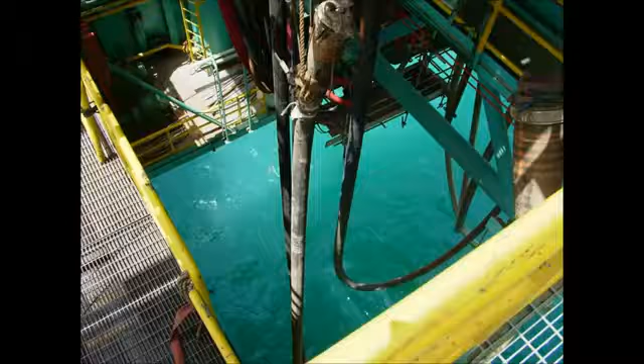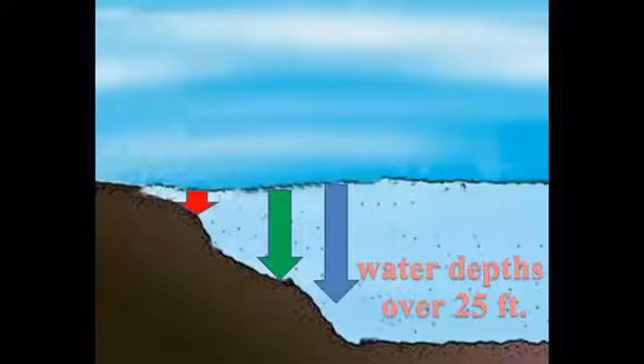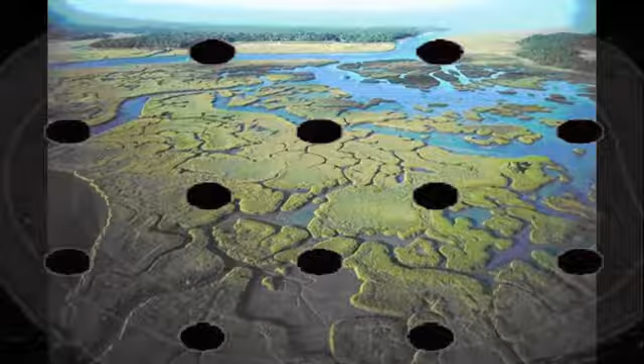When water depths reach over 25 feet, jackup rigs are used to complete the drilling program. Able to drill straight holes, not deviated ones, these jackups usually follow a grid-like pattern similar to those used onshore and in protected waters. Each well has a piled jacket that is either set down over the tree after completion or can be preset and drilled through from the cantilevered floor of the jackup.

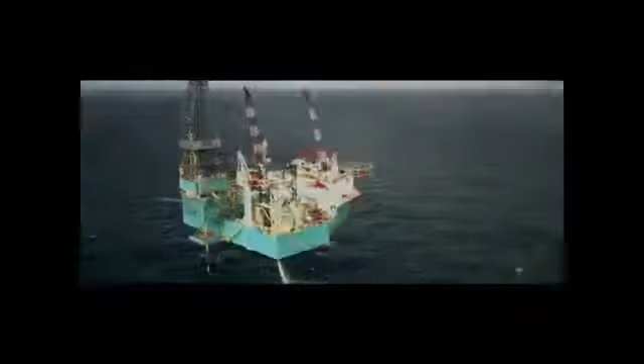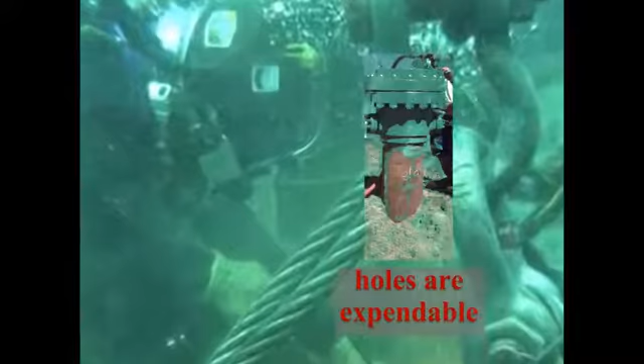Wildcat and delineation wells drilled in deeper water with more intense wind and wave action using a jackup, a drill ship, or a semi-submersible will be cemented and abandoned once the appraisal is complete. These holes are considered expendable because the delay in building the platform and the surface facilities to produce and support this field may take several years.

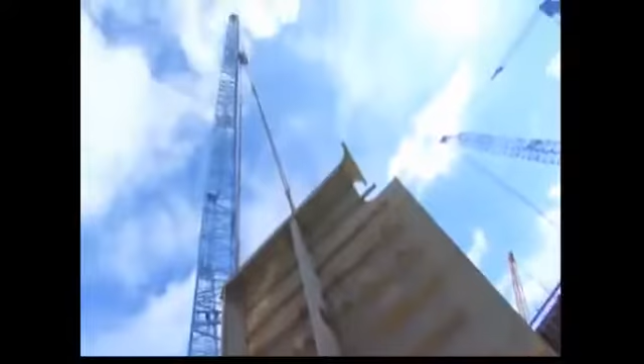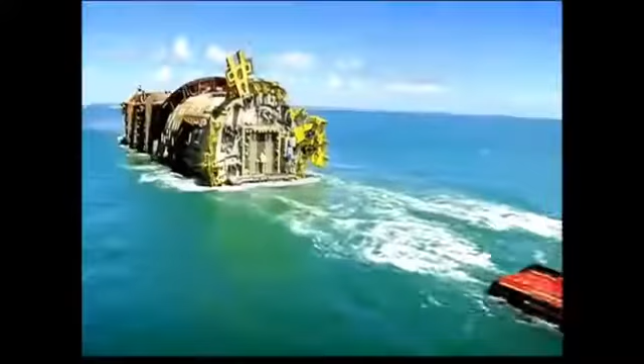Instead, once a platform is deemed necessary, it will be designed for the precise water depth, the intensity of the wind and waves, and the bottom conditions. Constructed onshore and then brought to the site to be reconstructed and installed, the platform will have a drilling rig installed, and the first thing that they will drill is all new holes for production.

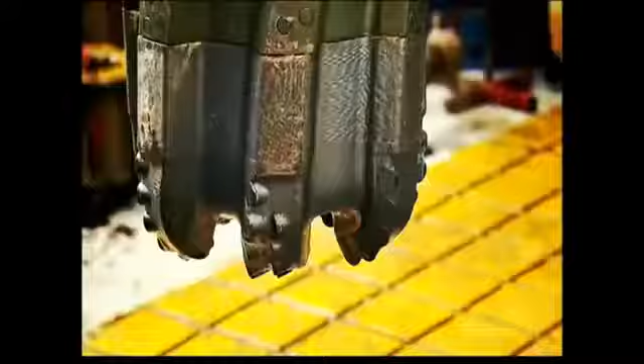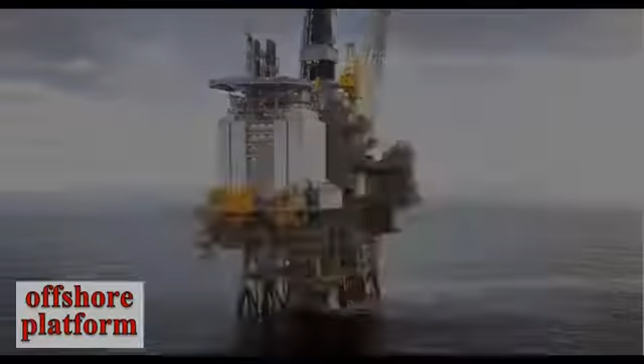As the water gets deeper, platform costs escalate sharply, so vertical wells with individual jackets are replaced by multiple directional wells that can be drilled from a single platform. Larger fields, however, can still support multiple platforms. A platform may house all the facilities associated with the rig, or the rig may be tender supported.

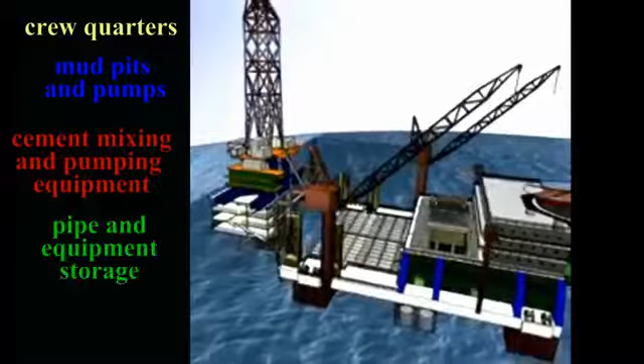If the platform is tender supported, this means that next to the platform there is a floating, anchored boat, either ship-shaped or semi-submersible. On this anchored tender are the crew quarters, mud pits and pumps, cement mixing and pumping equipment, pipe and equipment storage, and other necessary equipment. Lines connecting the tender to the platform carry power, cables, water, and mud.

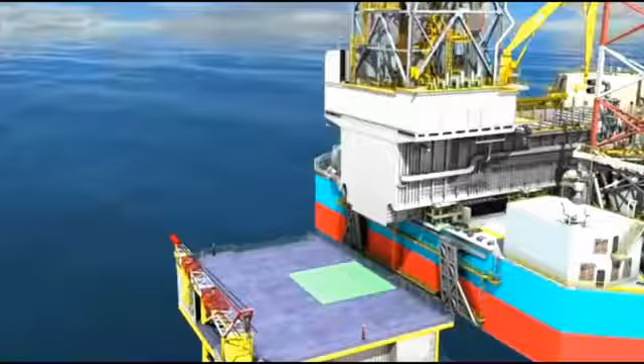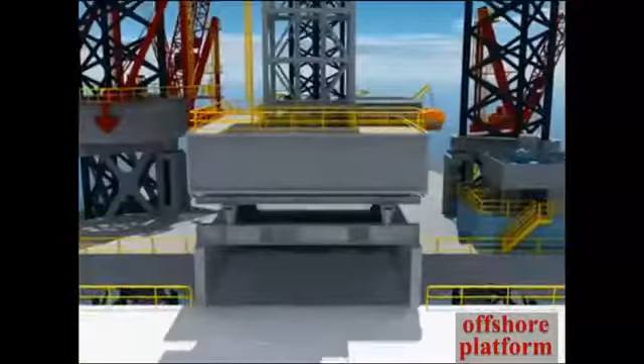After each well is drilled and completed on an offshore platform, the rig is skidded a few feet to the next slot and a new well is drilled. When all the wells have been drilled, the rig is lifted off the platform by cranes on the tender, and then the tender is towed to a new platform.

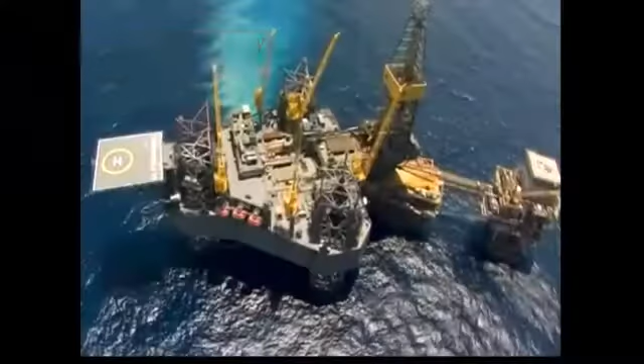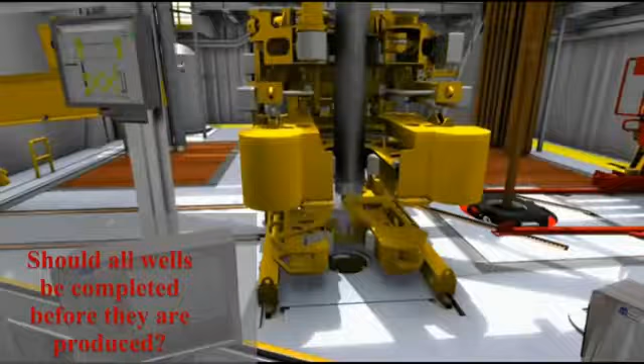Because crews can be in such close proximity to producing wells and production facilities on platforms, there are two major safety issues that plague those who drill offshore. Unfortunately, there are no easy answers to: 1. Should the production wells be allowed to produce as they are drilled, or should all wells be completed before production begins? 2. Should the treating facilities, a major source of fire and explosion, be placed on the same platform as the living quarters of the crew or on another platform?

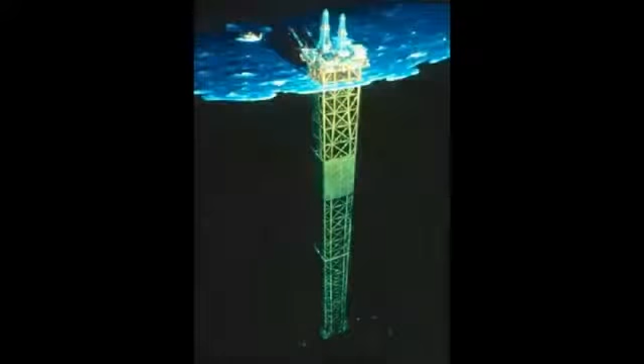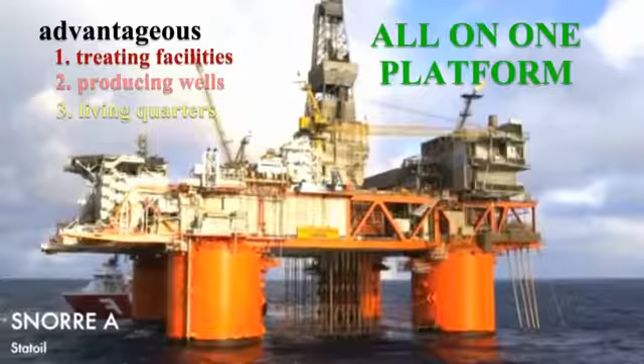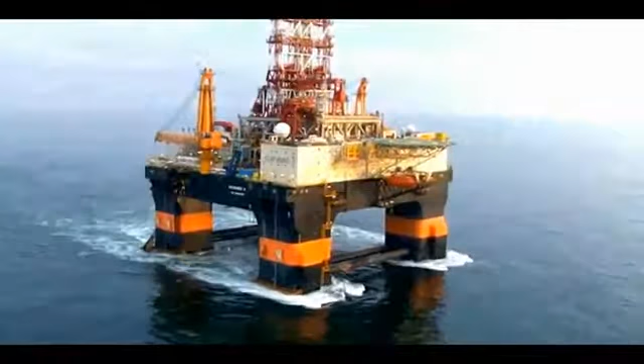As you might suspect, the deeper the water, the more economically advantageous it is to have the treating facilities, the producing wells, and the living quarters all on one platform. In the deepest water or in very harsh conditions, a single platform is normally used, either bottom supported or a floater with a tension leg configuration. The cost of having separate platforms for the treating facilities, the production wells, and the living quarters is just too prohibitive.

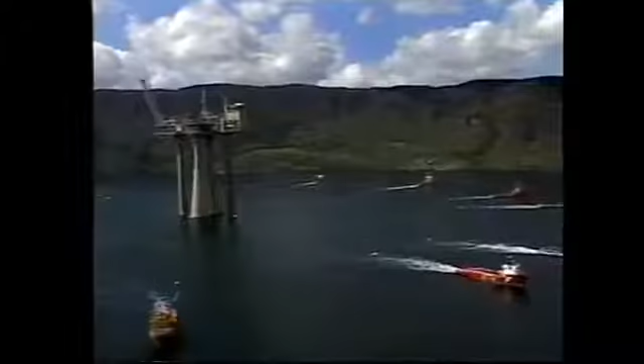Because of the risks to the people and to the facilities in dealing with highly explosive and flammable oil and gas, offshore platforms should adhere to the strictest fire and safety codes. The high costs and technologies needed to set platforms, either floating or bottom supported in extremely deep water, has increased the use of subsea completions.

Subsea completions are where the wellheads are installed on the bottom of the ocean, then connected by pipeline with nearby platforms. Here is an example. In addition, small fields can be developed in the vicinity of older fields that may have surplus facility capacity.

Now that the appraisal has been conducted and the wells drilled according to plan, it is now time to start facility site preparation. In site preparation, surface facilities that allow the crew to perform their jobs to support production are built. These surface facilities include water and gas separators, pipelines, pumping stations, water treatment plants, etc.

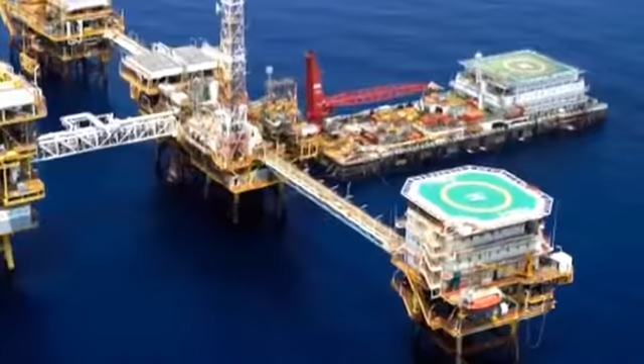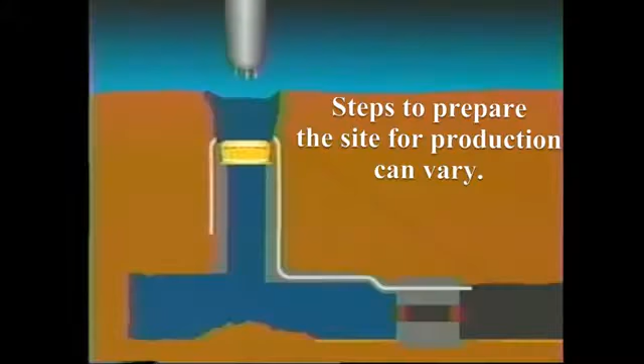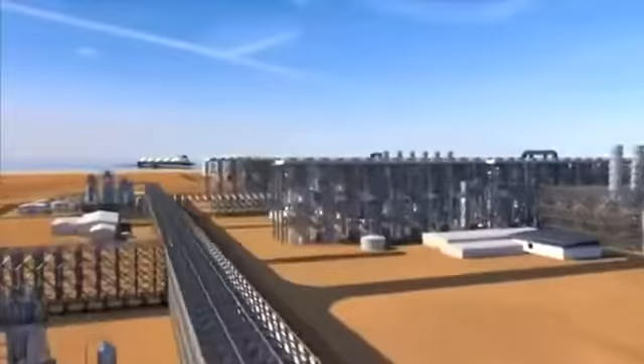When at all possible, it is best to house these facilities separately from the crew's living quarters. As explained earlier, though, sometimes this is impossible due to prohibitive costs. Depending on the location of the reservoir, the steps to prepare the site for production can vary along with their financial costs. Site preparation for easily accessible onshore locations near existing highways and pipelines can be fairly straightforward, while site preparation for remote, deep-water offshore facilities is much more complicated. Let me explain.

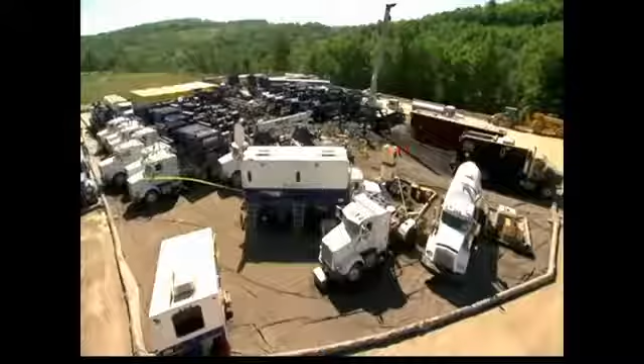Most onshore site preparations for surface facilities to produce oil are fairly simple in accessible locations near roads and modern-day infrastructure.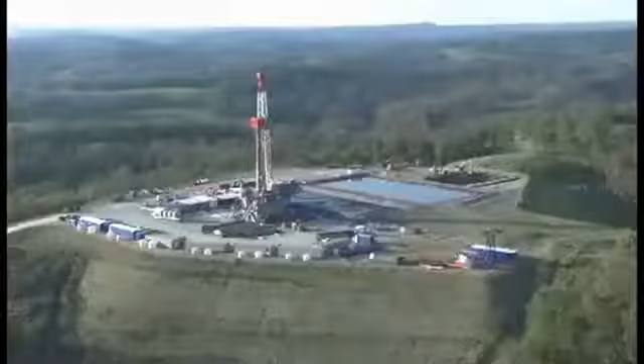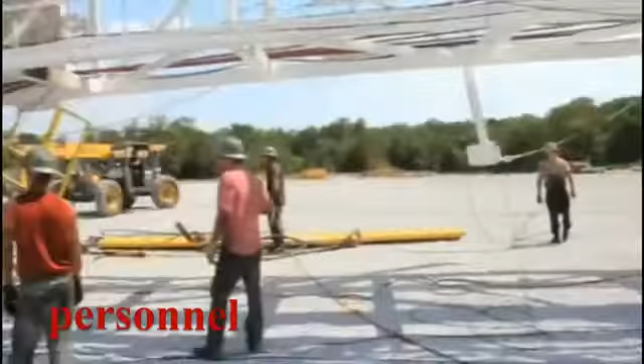In Chapter 6, we described the steps involved in preparing a site so that a land rig could be easily moved into place for exploration. For production, the process is similar, thus allowing the production equipment and personnel to easily access the location. The ground is leveled, a drainage system is installed, crushed rock or other surface stabilizing material is spread over the site. In swamps, raised roads, paved with planks, may have to be constructed if they haven't been already. But overall, it is still a relatively inexpensive endeavor.

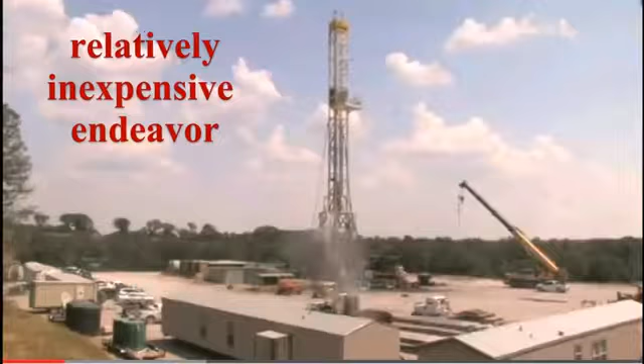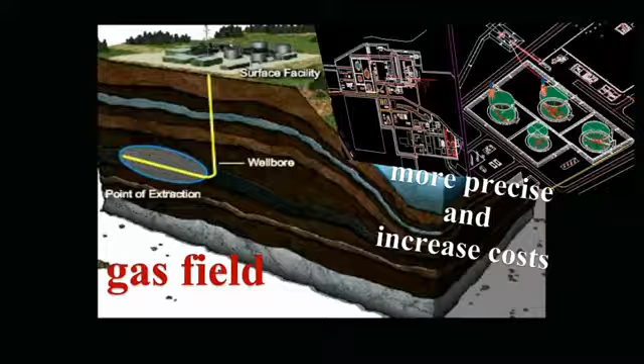In remote onshore locations, far from modern-day infrastructure, preparing on-site oil production facilities may be more complicated and certainly more expensive. Here, not only access to the site must be built, but also the means to get the hydrocarbons to the refinery must be constructed. This may mean building new roads and/or pipelines. As mentioned earlier, for example, site preparations for developing gas fields must not only be more precise, but can also greatly increase the upfront development costs.

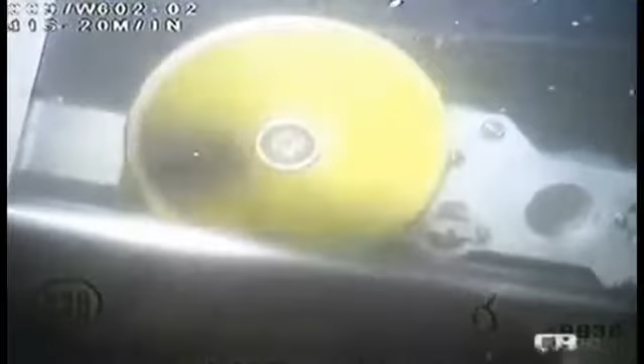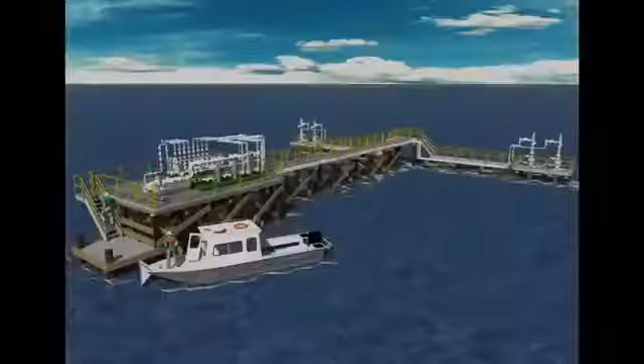Going offshore raises the site preparation costs considerably. In addition, the depth of the water and the intensity of the wind and waves also impact the bottom line. Preparing locations in shallow protected water such as lakes or estuaries, although usually costing more than onshore, are the simplest. Here, we'll explain three types of construction used offshore.

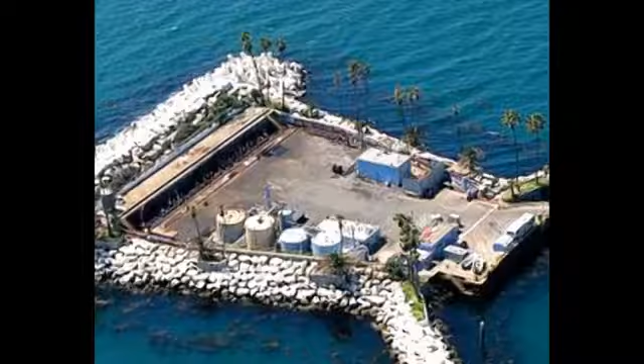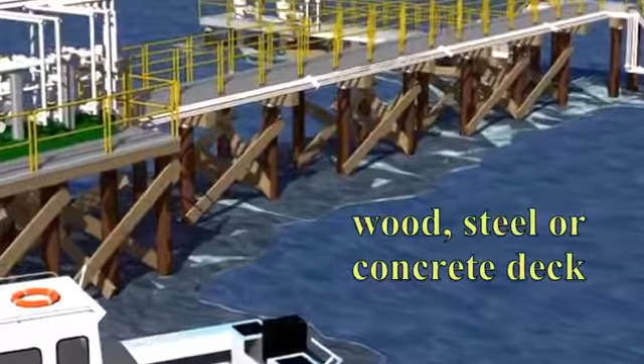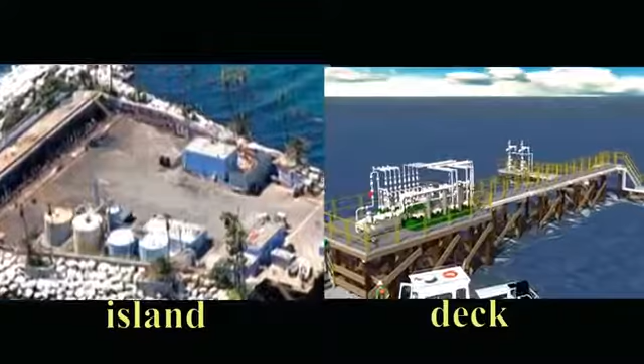In the first, in shallow water, dredged bottom material may be used to raise the location above the water to create an island. In the second, wooden or steel piles may be driven into the bottom to support a wood, steel, or concrete deck. In the third, floating concrete barges are constructed, towed to the site, and then flooded to rest on the bottom. On the island and the deck, surface facilities are built on top after construction is completed. When using the barge, surface facilities are prefabricated on it before the barge is sent to the site.

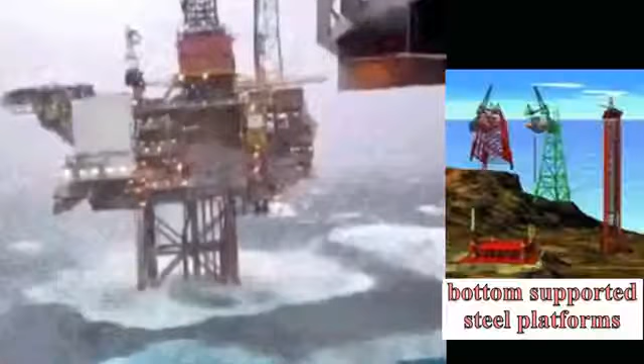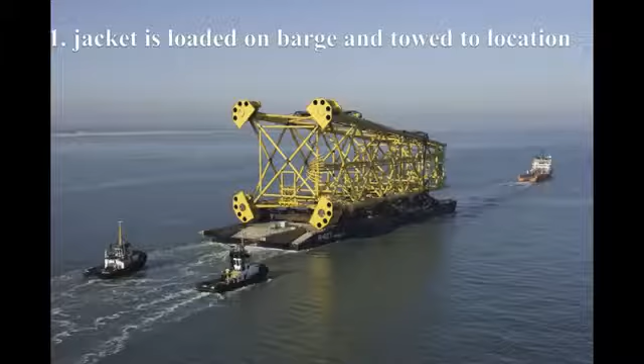In deeper, unprotected water, surface facilities are constructed on bottom-supported steel platforms to provide the necessary load-bearing space. Built and installed in two sections, these steel platforms consist of a jacket extending from the bottom of the ocean to just above the waterline and the deck section. First, the jacket is loaded onto a barge and towed to location. Second, the barge is then partially flooded and the jacket is launched. Next, the structure is floated horizontally at the surface by flooding selected jacket parts.

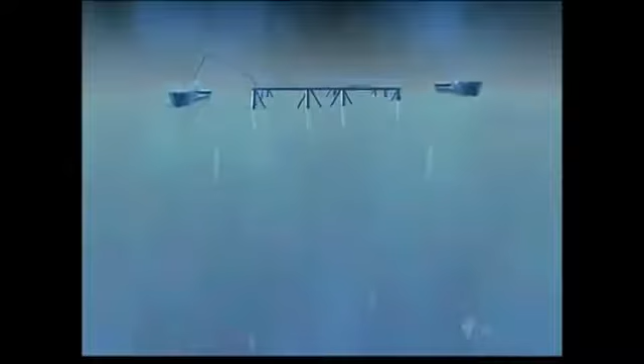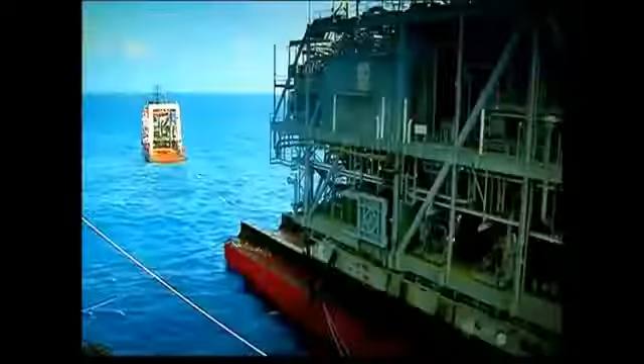Third, the jacket is brought slowly to a vertical position by flooding different chambers. This forces the jacket down to set on the ocean floor. After that, steel pipe is driven through the jacket legs deep into the seabed. A derrick barge then lifts the deck sections from a barge and sets it on the jacket. Finally, the derrick barge stacks the prefabricated facility modules on the deck.

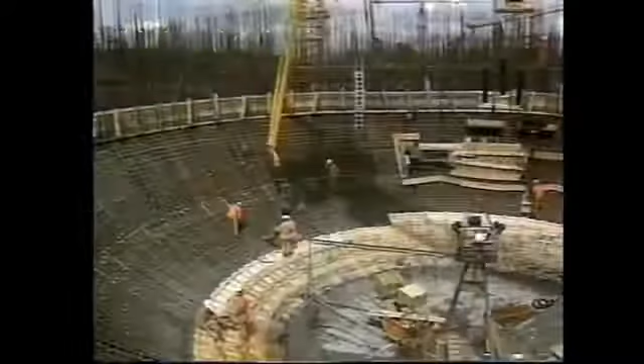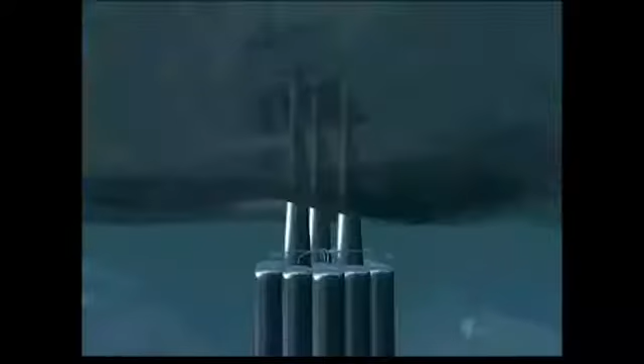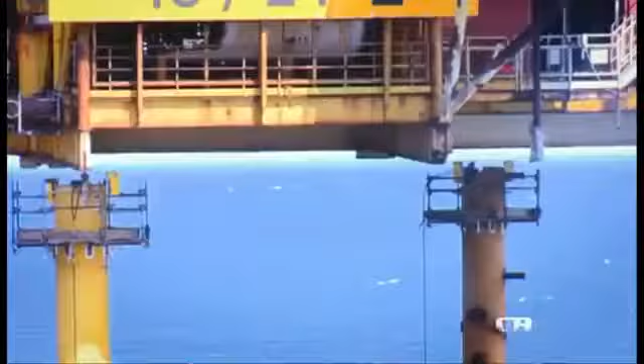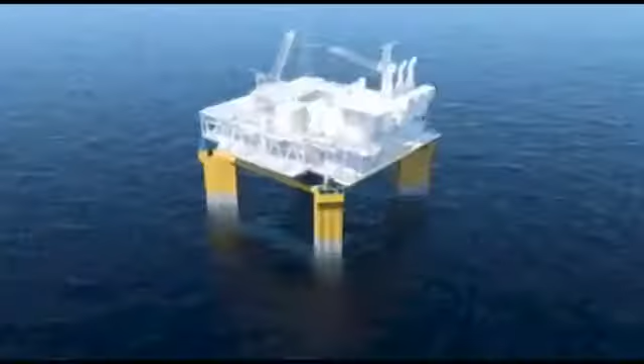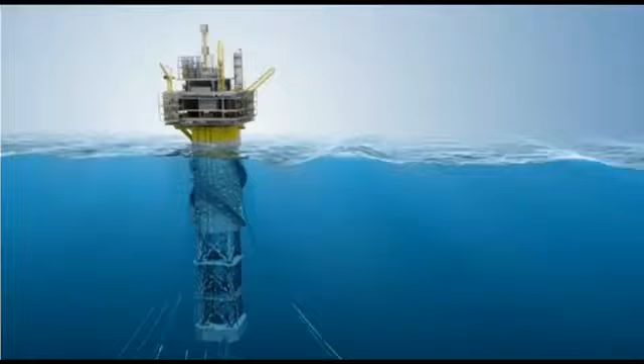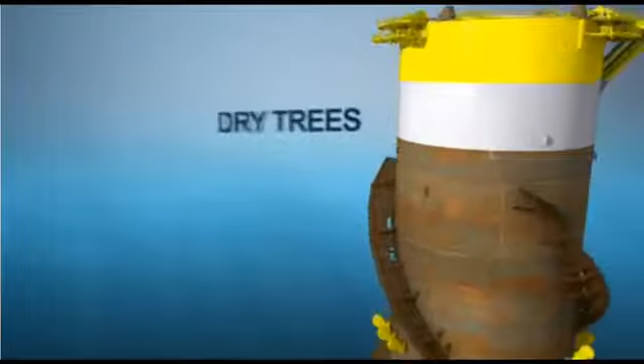In very deep water, where steel or concrete platforms are cost prohibitive, buoyant platforms are increasingly being used. A popular configuration of a buoyant platform is the tension leg platform, which is tethered to piled pads on the ocean floor by strings of steel pipe. The platform's movement in severe seas is controlled by keeping the strings under constant tension. In these buoyant platforms, spars or buoyant vertical cylinders are affixed to the bottom and stabilized by anchor lines. These spars minimize vertical motion caused by surface conditions and are thus able to support production facilities in very deep water.

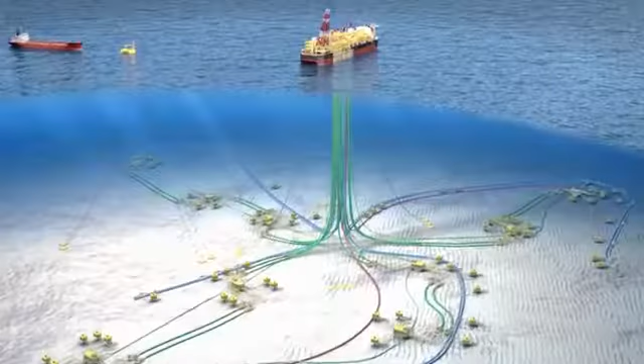In addition, with today's precise, powerful computers that can stabilize movement, seagoing vessels can be temporarily anchored in place and used instead of steel and concrete platforms. Called FPSOs, for floating production storage and offloading vessels, these seagoing vessels can be either ship-shaped or semi-submersible. Used in conjunction with subsea completions, they are cheaper than platforms because production does not have to be delayed while waiting for one of these mammoth platforms to be built. Likewise, when the field is depleted, these FPSOs can easily be disconnected and moved to another location.

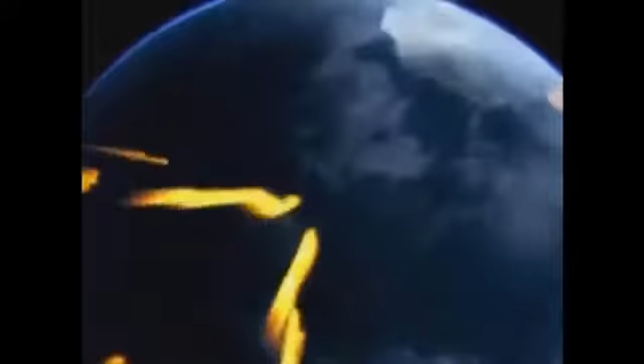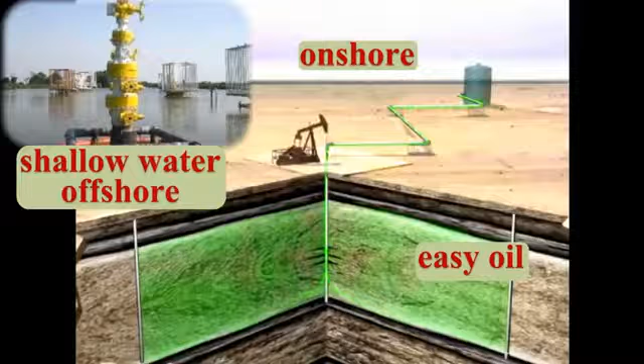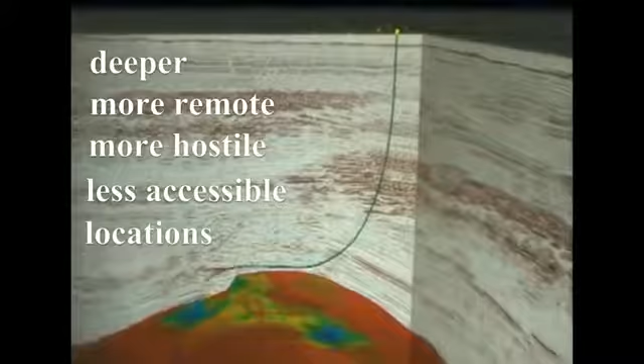As you can see, the economics and technology of preparing a site to produce an oil or gas field depend in part on exactly where that oil or gas field is located. As you may have heard, the easy oil, the oil that is located onshore near existing production infrastructure or in shallow water offshore, has already been produced. In the years to come, oil and gas production will come from deeper, more remote, more hostile, less accessible locations. It will be newer, better technology that will help determine the economics and feasibility of getting that oil and gas out of the ground and to market.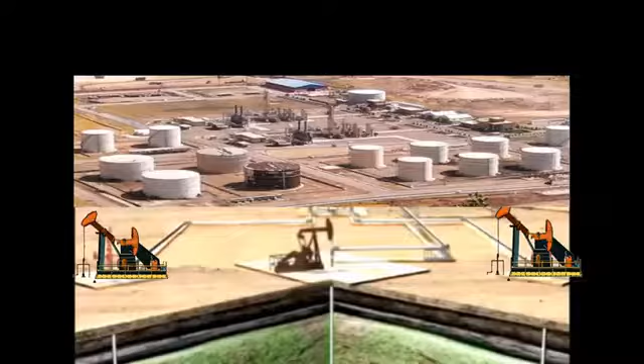Let's recap. Even with newer and better technology, the location and dimensions of the field that the wildcat well has tapped into still must be appraised with step-out, well spacing, and infill drilling. When the field is given the go-ahead for production, more wells must be drilled and facility site preparations constructed so that the field can be safely accessed and where the hydrocarbons can be safely separated and transported to market.